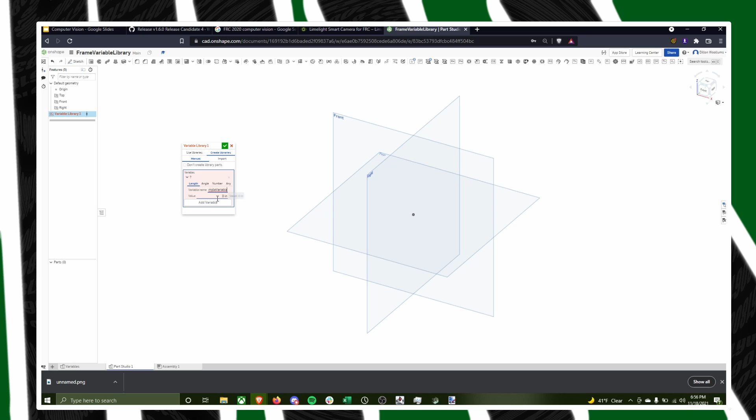So if I want to say, like, example variable, value 1806 inches, I can. So then when I want, say I went and... can I create another? Okay, you can have multiple libraries.

So I created this one already. It's a little bit incorrect. If I want to make that like 27.75 and 31.25, frame height would just be like 5.

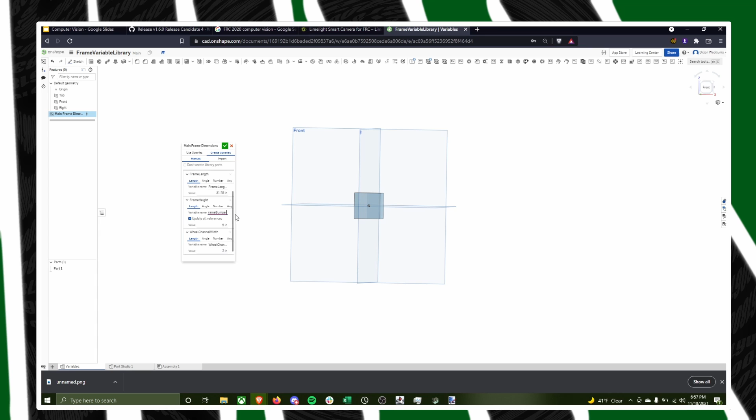Frame bumper height is 5.5. Wheel channel, which is like the outer edges - I can define all those here in a variable library so that they can be referenced in multiple documents.

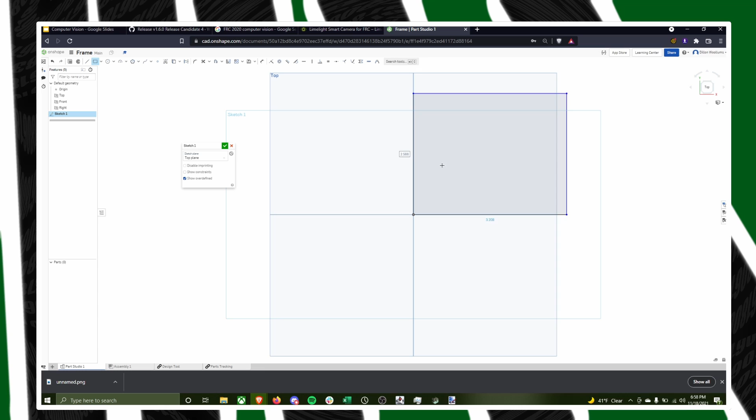Then if I go back to the frame, I'm going to delete this sketch because I want you guys to. But if I want to make a rectangle, say, my first sketch, and then actually opt out of this, use libraries, frame, other documents, storm surge, frame variable library, part studio 1.

Hold on. It doesn't like that for whatever reason. Jump back to frame. Use... is not seeing it. Oh, variables, there we go. Took it a minute to see it.

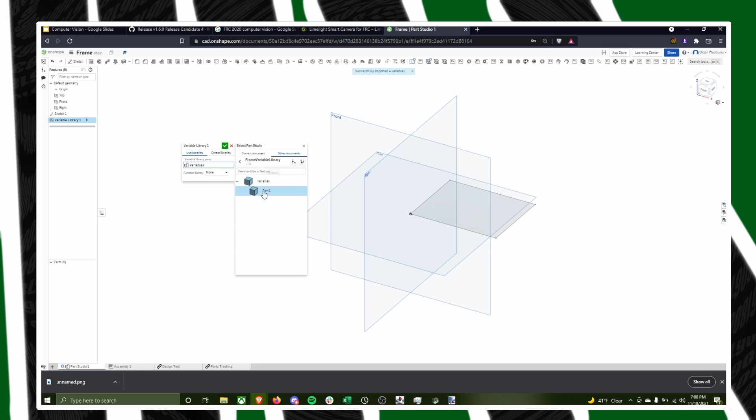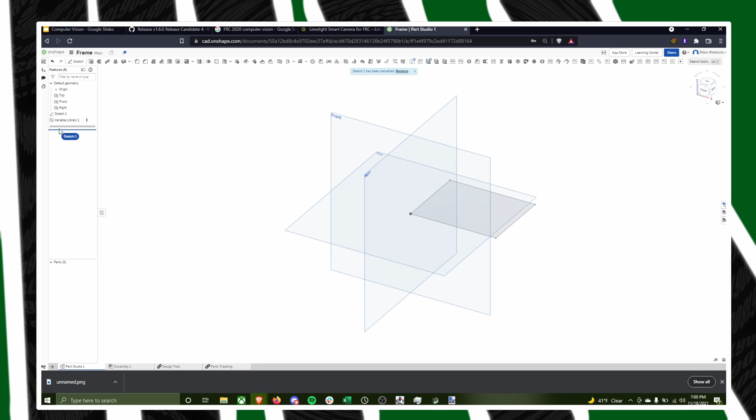So if I go variables, part one, select, I should be able to go back to the sketch, dimension it to... right, this I need to import the variable library before I can use it in the sketch. Ah, see, I can make this like frame length, and it just pulls in that number.

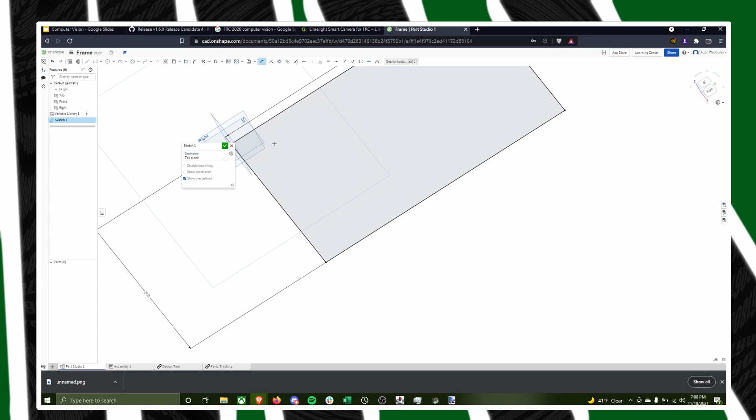Dimension this, make it hashtag frame width, and then hit checkbox on that. And if I want to, I can extrude by bumper height, and it's all here.

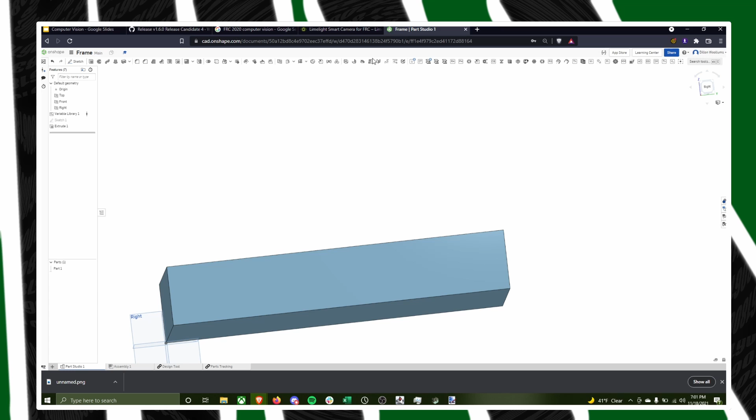And if I leave this document, say you make a whole bunch of geometry to define our frame based on those numbers, I can go into the frame variable library and say I want to change the dimensions of the frame. I can be like, oh, this is 7-inch high bumpers now, and we're a 25 by 25 robot.

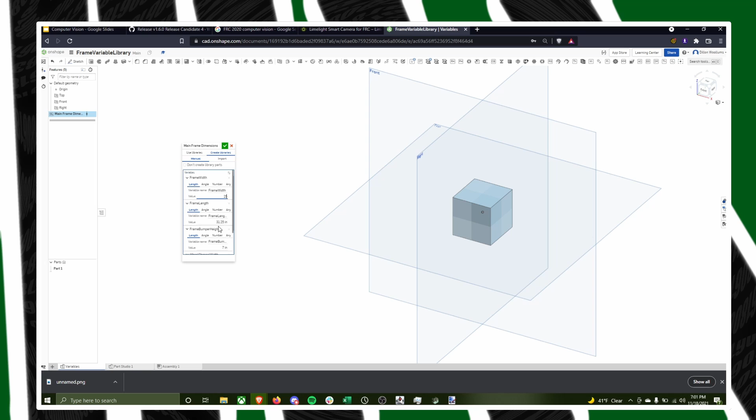And leave, go to the frame and measure this. It didn't update yet. Oh, okay, so you have to create a version before it pushes.

But if I want to go to V2 and then import new changes... I imported the wrong Part Studio. There we go. This should now be 25 by 25 by 7.

So yeah, variables, they're really handy. We should use them this year.

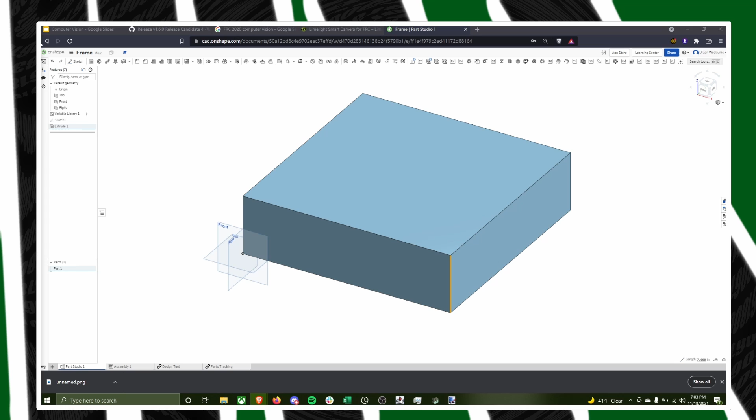Let me fix... I don't want to create a new one. I actually want to get rid of V2. Well, what I can do is I can restore to main. Create version V3.

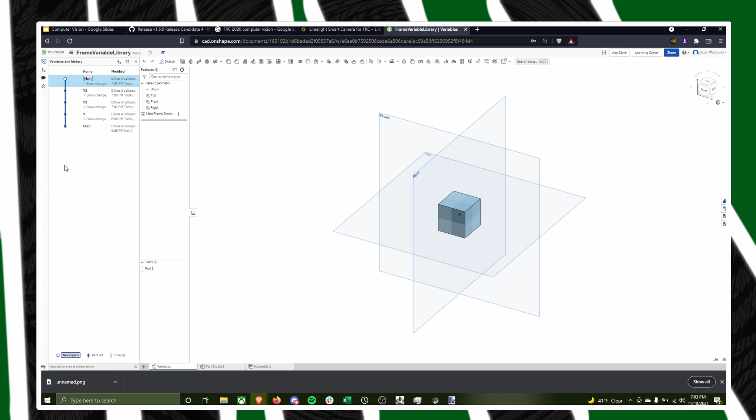And then if I go back to frame, I can look at variable library. Re-import the frame variable library. And we're back to where we were.

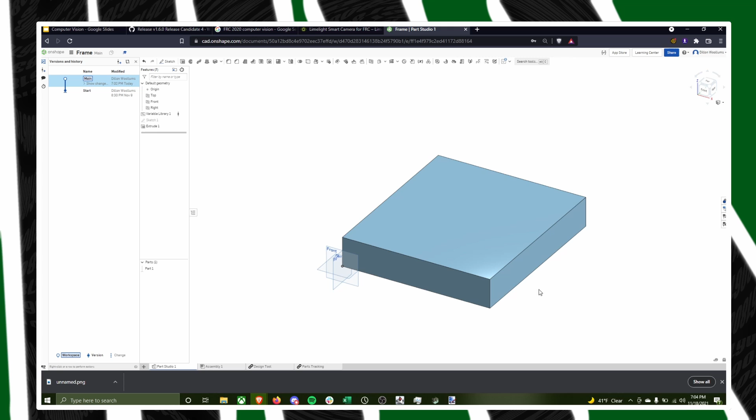So yeah, I'll leave this here because this is nothing close to resembling what our actual frame should look like, other than it's a cube that would represent it, as a square. But you guys can continue working on CADing the frame. Someone needs to take ownership of that.

Anyway, see, anything else we wanted to talk about for Storm Surge? Probably not. I don't see much in the way of prototypes being made here. Granted, it's only been a day.

So let's see about some computer vision. We haven't had time to do that for the last few years. I hope we get a chance to do that this year. Again, depends on how fancy we're going to be.

So most years the goals have retroreflective tape on them, and if you take a camera, turn the brightness down, turn down the exposure, and put green LEDs around it, what you get is, instead of something that looks like this, which is what your human eye would see on the field, you see that.

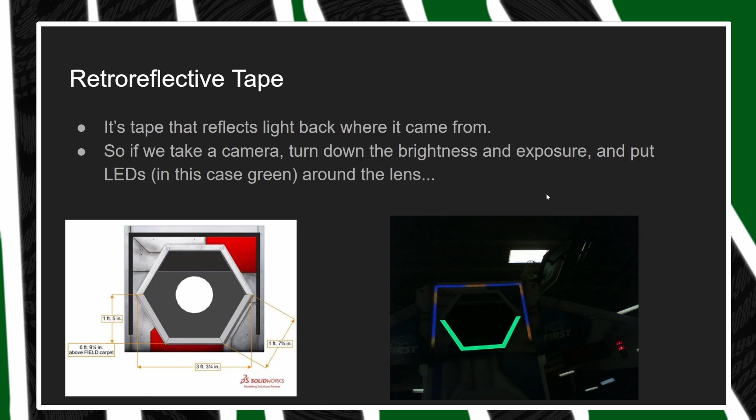There are some instances where if you could deal with slower input data to get better data, or if you just have a good enough coprocessor to deal with it, more data would be nice. Being able to actually aim for threes when you're off to the side would be a really nice feature of your robot. It would be really cool. We just didn't have time to do it.

Most other teams just use the Limelight. We probably should too. And if we need something fancier, we've got the parts laying around for a fancier vision processing system. But to be honest, fancier vision processing falls into the purview of being so complicated that it's really just my own pet project that I'm doing because I'm bored.

But it's got this nice web interface. It runs at like 90 frames per second. We should probably just fundraise and try to find a way to buy one of these things. Like, how much does it cost?

$400. That was the other thing about why we tried using the Jetson and the Brio, that's like a $150 webcam, and that's like an $80 coprocessor, and if it works, it should be better than the Limelight. It's just we didn't have time to make it work.

So while just using the Limelight is sure a convenient option, it's expensive and kind of a lazy answer. It's correct because we don't have time during the build season to mess with the Jetson, but maybe some summer we'll do a summer project where we mess with the Jetson and a swerve drive at the same time.

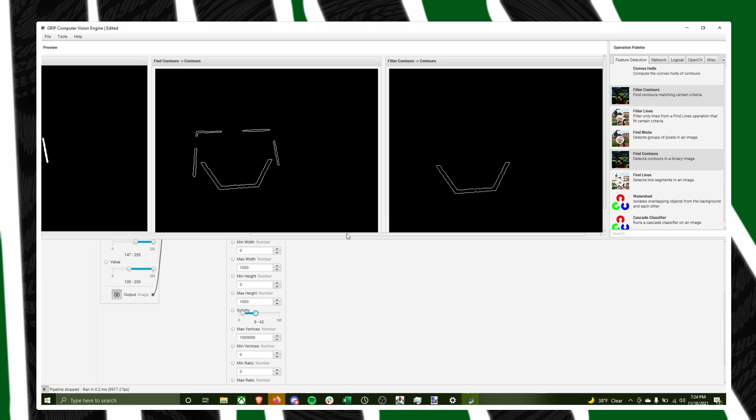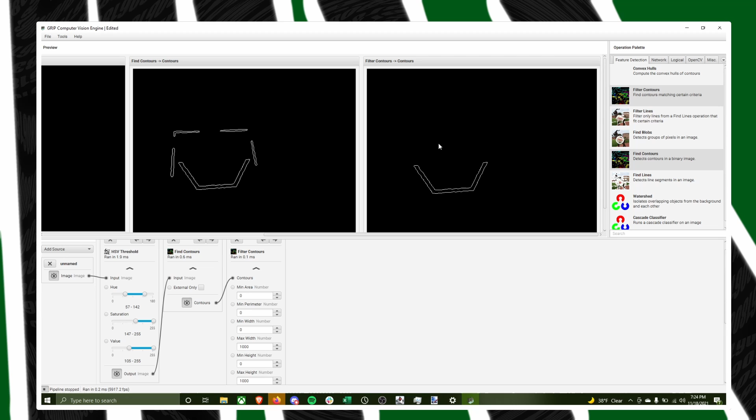But you can see how you can use this to test your vision pipeline: HSV threshold, find contours, filter contours. For retroreflective tape, that's usually all you need. There are other things where you can do color detection to detect a ball, but it ends up being some permutation of this. Then you need to use the information, these points, to figure out where the goal is. So let's jump back to the PowerPoint for that.

So what can you do with contours? You can get information from them. There's a link to a video for a more advanced implementation and for some functions we'd actually use if we were doing vision processing. But for now, you need to know some information about your camera.

So you need to look up your camera's horizontal field of view. Horizontal field of view is how far side to side your camera can see, in degrees. Vertical field of view is just how far up and down it can see.

Resolution of your camera — so 1080p is like 1920 wide by 1080 tall. If you know what a pixel is, it's those little squares. We need to know that information about the camera to get information out of it.